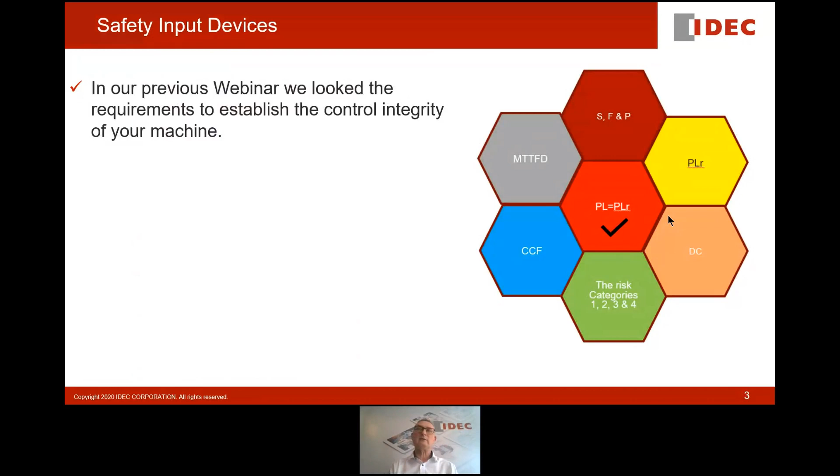So let's move on. So previously, in the last presentation, we discussed the control integrity of your machinery. So we looked at the performance level and how to achieve that and all the characteristics that were necessary to understand to make that happen. But in this part one of two, we'll be looking at the mechanical input devices of the ILO, the input, logic and output.

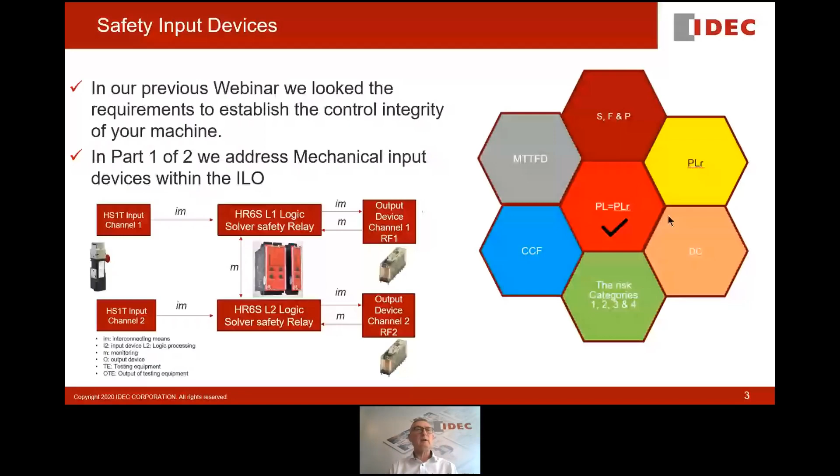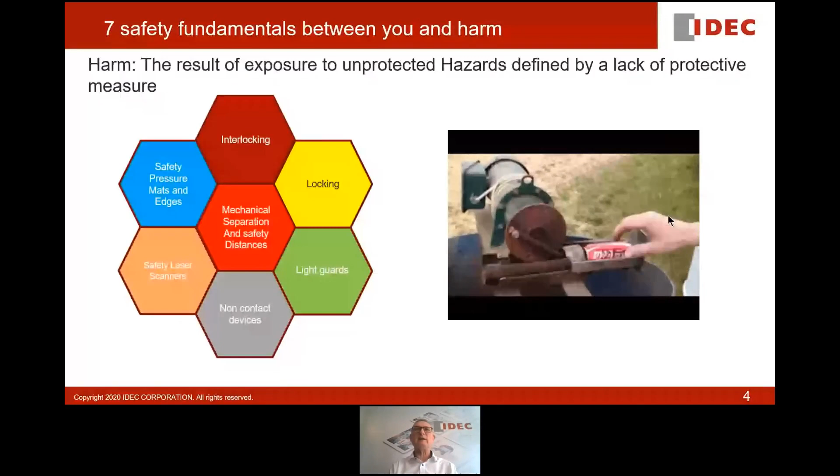So first of all, 7 fundamentals that you need to put between you and harm. And I'm sure we can all look at the video on the right hand side and see what could possibly happen. We can all have a guess about what could possibly happen, but we all have a pretty good idea about what will occur. We put the separation techniques in place to ensure that we don't get exposed to harm.

And to do that, we have to identify the hazards that exist on the equipment, with the equipment throughout its entire life cycle if you're building machines. And then we have to address all of those hazards that exist: electrical, thermal, biological, chemical, physical, mechanical, hydraulic, noise, and it goes on and on. And the only way that we can actually fully identify that is by performing a full and detailed risk analysis.

Once you have done your risk analysis, you then structure a safety requirement specification, which we covered in the first webinar. And the safety requirement specification lays out the requirements to make your equipment safe. So it's not a case of we've got a door guard and we need a switch. It's we have a hazard. The separation is by application of a method of mechanical separation. We need to interlock it.

So it's really important that we do it by risk assessment and not a hunch. So do not shortcut the risk assessment phase, because it is an iterative process and you will go back and use it in your validation.

So what is the route to selection of good and useful interlocking devices? Well, the good news is that we have the Machinery Directive, which I've talked about many times before. And in there, it clearly states that moving parts of a machine must be designed and constructed in such a way as to prevent the risk of contact. And it must not lead to an accident. And where the risk persists, you have to have a guard fitted and potentially protective devices that separate that guard.

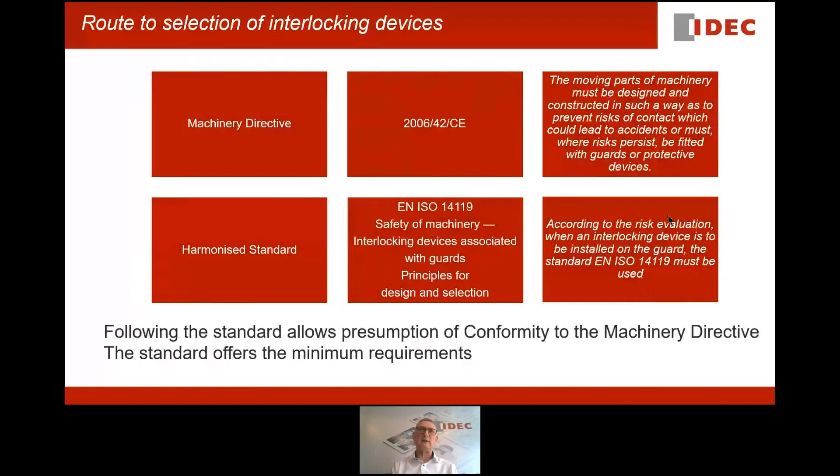But there's more than just that one standard. I've just taken a few here, but these are the most common ones. Clearly 12100 will identify the hazards that exist on the machine and gives you a means of evaluating the risk that they pose to the operator using it. But it's not just the operator, it's the people who are moving around the machine.

And for that reason, you have guarding from EN ISO 14120. And if you're choosing a guard and you're selecting a technique or a type of material, you need to understand the safety distances that the guard is positioned away from the hazard. You need to understand the speed of approach that the person who goes into the machine is actually moving at. If the machine is moving extremely fast, is it going to come to a halt before the operator has been exposed to that moving hazard?

And if you're bringing a machine to a halt, it's very often the case that you're controlling energy, and you're controlling that through a means of shutting down or isolating paths. And those isolation paths and control techniques are detailed in EN ISO 13849 Part 1 and validated in Part 2. And that's particularly important because when you start talking about the approach speeds, you're now talking about controlling the devices and their reliability and how they perform.

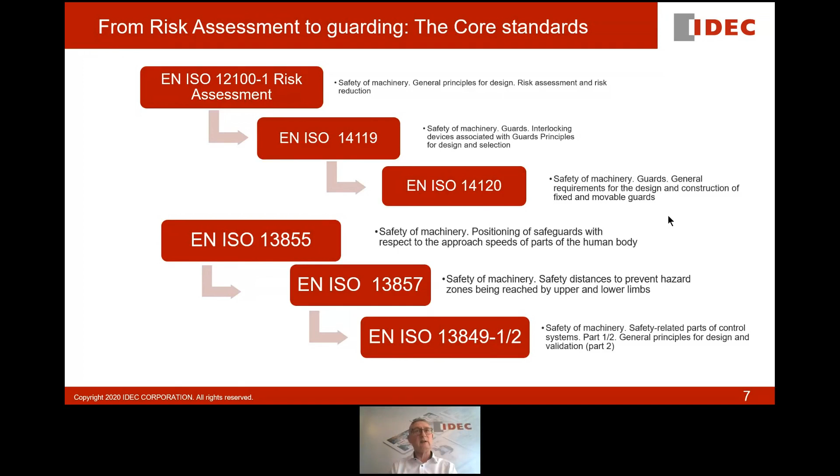So that standard allows you to assess the performance levels of each of the devices that you are now relying on, and the input, logic, and output combine together to create three systems that join up and ensure that that machine has stopped at the appropriate time when you gain access.

So what is the hierarchy? There is a hierarchy that we have to go through. And first of all, when we have a sheet of white paper, if we want to make pizzas, I always think of this one because I've seen it before, could we make pizzas at an industrial level without using a pizza press? Probably unlikely, but it should be considered. Is there a way of shaping the dough in such a way that it would design out the function and actually make it irrelevant to the manufacturer of that process? And that is number one.

Once you've actually done that, then you need to look at the hazards that have been identified in the risk assessment, detail them, and look at whether or not you can improve the functionality to create the same effect. So I'll take one example. We have a square-edged pin going down through a hole, and if I were to catch my hand in there, that square-edged pin would sadly rip the end off of my finger.

However, if I make the first 20 to 30% of that pin tapered, if my finger were to be caught, it gives me an increased chance of escaping because the tapering will create a gradual and progressive pressure rather than an instantaneous shearing. So simple examples like that can be applied. And when you do that, you start to reduce the risks at each point identified in your risk assessment. But eventually you get to the point where you know that there's still a trap point and it still could create quite a severe injury.

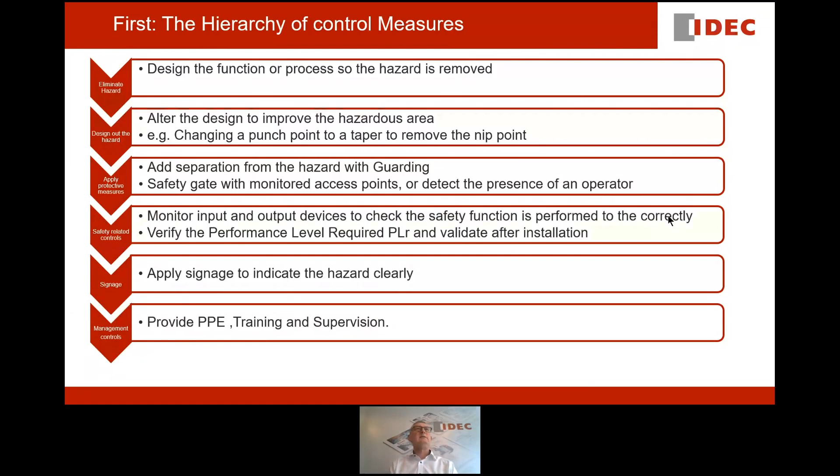So, what are we looking at in 14119? We're looking at guarding and interlocking with or without a locking function. We look at escape release. So if someone is entrapped in the machine, what do we do to open the guard and get out? We have to consider the physical conditions that these interlocks and guarding devices are being used in. We have to identify whether or not there would be resistance to defeat and whether there's a reason to defeat a guard. And that very often comes up in the risk assessment.

And just on a light note, if you ever don't believe that a guard is being overridden, just go up to the machine, look where the footprints and the hand points are, and you will find out where that guard system is being overridden. It's always a telltale sign.

We address coding of the devices to ensure that they can't be overridden with simple means that are in the workplace. But we also have to talk about fault exclusions. These are errors that could occur but are highly unlikely to occur in such a way that would affect the safety of the machinery. We'll come on to that in more detail in the next presentation.

We look at the basic principles of applying the devices, the functionality of interlocking and the allocation of the interlocking types, because there are 2, 3, 4 different types of interlock that we have to address. And we also have to talk about holding force, mechanical and electromechanical, and signaling when the door is shut.

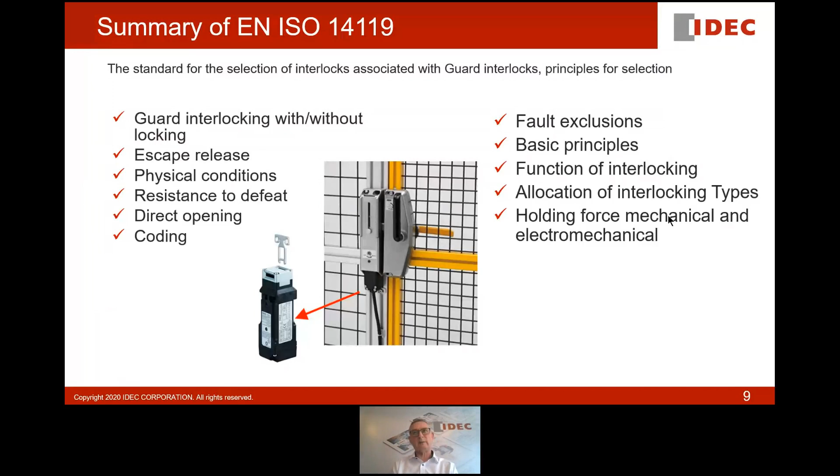So a few moments ago, I mentioned the interlocking types. Well, there are 4 basic types, 1, 2, 3 and 4. So we have type 1, an uncoded interlocking device, normally a cam-operated device, which can detect whether the guard is open or closed. It has some issues, which we'll talk about under fault exclusion and common cause failure in a while.

And then we have the type 2 interlock device. That's a device coded in some way so that you can't just stick a screwdriver or a hair clip in there and make it work. It has to be what is known as tamper resistant.

That's a very common device, very often used, perfect for use on small to medium-sized machines. But on the larger machines, you can simply increase the rigidity and the strength, and you can add further mechanical means that put the door action in a shear and the switching action in a more linear path that is not exposed to the same level of force. So engineering design and how you apply it is particularly useful.

And then we have type 3 and type 4, coded and uncoded. So magnetically operated switches are perfectly acceptable to be used in a safety environment. They have to have means of protecting their internal contacts. The clue is in the name.

They are non-contact switches, which means that when the door shuts, there should be a buffer, and that buffer should prevent the devices from coming into contact with one another. They are incredibly reliable. They have a very high switching frequency and a very high lifespan, provided that they remain not in contact.

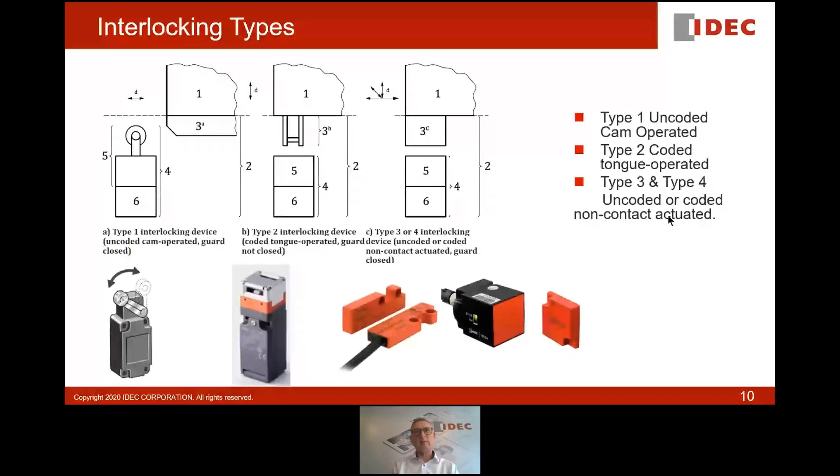So I probably already talked my way through this slide, but fundamentally we've got mechanical and non-contact switches. In the non-contact, there are lots of different technologies that are acceptable: inductive, magnetic, capacitive, ultrasonic. Of course, you can use optical. What is important to remember is, with devices like inductive, if there is a risk of an accumulation of ferric material, it could in fact cause a nuisance tripping. So it's very important that every single time the door opens and closes, that sweeping action takes place that creates that removal of anything that might be built up.

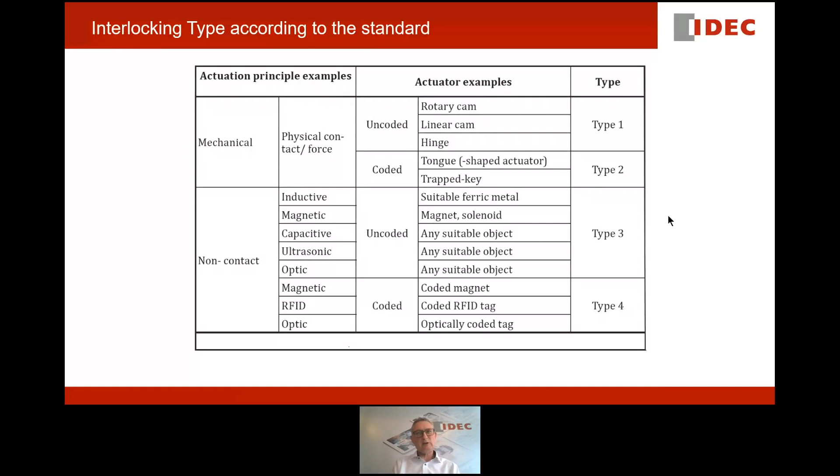So uncoded and coded devices. When we start talking about the coded, you can code up with multiple magnets, with north and south, south, north, and so forth, normally about 5 or 6 pairs of magnets, all operating in a different way, but when they're switched together, their common signaling gives you 1 or 2 channel output. And with the RFID, the tagging gives you similar to all of the tagging that you see on the products around the world, but the coding is set in such a way that as you tag, it is unique to the application, and somebody can't come up and just bring another actuator up.

So let's just go back to the very beginning. And if you have a limit switch fitted onto a machine, you see it all the time. In fact, in some of the standards for presses and for injection molding machines, it's the prescribed method for utilization on a machine. You can fit 2 limit switches. But if you apply a single limit switch, then that has to have direct opening contacts. And a single non-direct mechanical action must not be used. It has to be paired with a direct opening device. And a direct opening device is defined by the little arrow symbol.

And as you slide the door guard across, the leading edge of the door guard compresses down and forces the door open, and the switch contacts open. And the switch that's following, trailing down the bottom, for example, here, as it follows, the spring pushes up. That is not a safe function, but the primary safety function has been taking place in this position. And then when we close the door back into the run state, we are then using this leading edge to compress down the switch. And if there is a problem, it will break and separate the contacts.

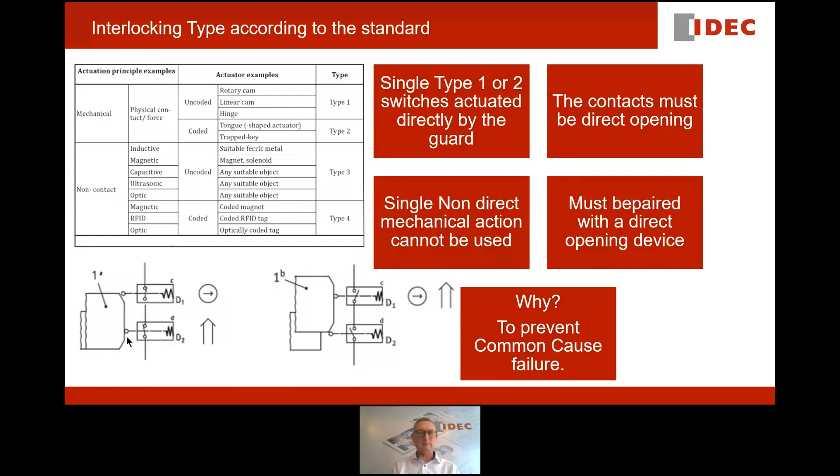So why do we do that? Well, it's to prevent common cause failure, because roller limit switches, as they stand on their own, have many things that can go wrong with them. The worst case thing that I see is a single switch being fitted with just 2 fixings. You only have to undo 1 screw and you've completely defeated it. So 4 screws applied properly and 2 devices monitoring both the forward and the backward travel gives you an excellent dual channel, dual switch means of monitoring.

So let's have a look at the guarding and the definitions. I think this is really quite basic. Yet every week, pre-COVID, I go into factories, and I see the same problems time and time again. So we'll go back over these points now. Fixed guard with screws, nuts, or welded into place. It can only be opened or removed by the use of tools or by the destruction of the fixing device. So it's pretty clear. You cannot just wander along and unhook that guard. Fixings must remain attached to the guard in place.

So when you unscrew it, the fixings have to remain through the metalwork. And that's normally done just by adding like a crinkly washer on the back. And then when you take it off, all of the screws go with it. Well, why is that? Well, in simple terms, day 1, it's got 6 screws. Day 10, it's got 4 screws. And finally, it's just got 1 screw left on the top.

So having them in place means that it is put back on properly. And if you don't do them all up, then the guard will be projecting and will have to be screwed down properly. It's very visible. So where possible, you should not be able to have the device hanging in place. So things like keyhole slots are just not permitted. You can't just hang a keyhole slot on and then unhook a guard. That's a movable guard and we can't have that.

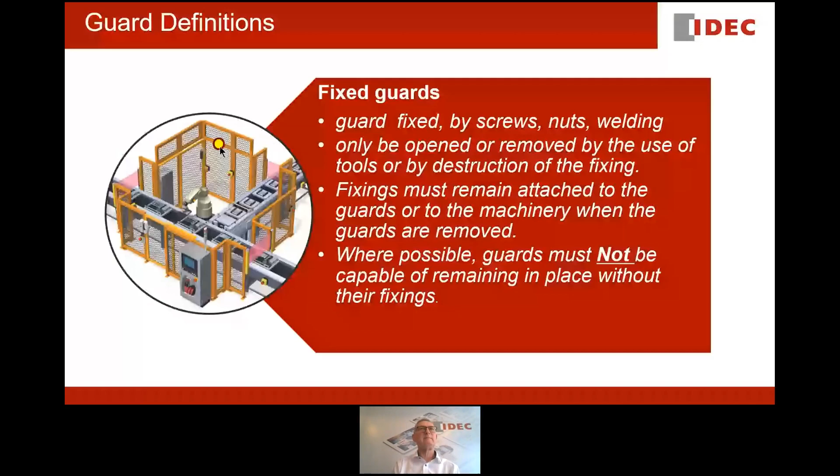Now, in the world of safety, we do live in the real world, and we accept that this job today will be different to the job tomorrow. So the better the adjustability and the better the application is for putting the guard in the location where you think the hazard or the parts are being ejected, the better it is. So it's okay to use adjustable guards, but most importantly, training and supervision, making sure the right people know properly how to use this. And you'll find normally in an engineering workshop, within their risk assessment, they have skills matrices which detail who can do what tasks and whether or not they're authorized to perform that use.

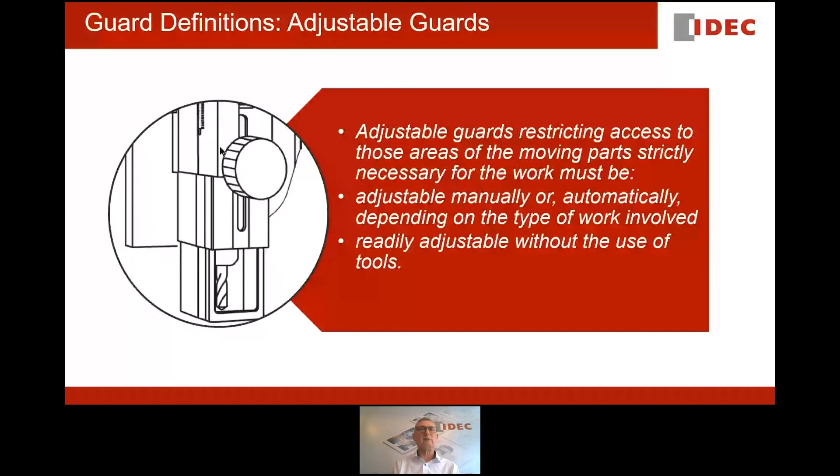And then we have interlock movable guards. And those guards have to ensure that the hazardous functions that exist on the machine are in an off state if the guard is utilized. If the guard is opened, then a stop command has to be given, and that stop command has to shut down the hazardous motion. And we start to consider here the distance between the hazardous motion and the active moving components that are going on inside.

But we also have to think during our risk assessment, how many people are working in the area? Can they move from one location to the other? Can they move through from one position into the other in the machine? Are there multiple people? So once you get into this movable guarding, you've then got to consider the zone of control, the zone of control of the emergency stop, and then consider how far people can progress inside.

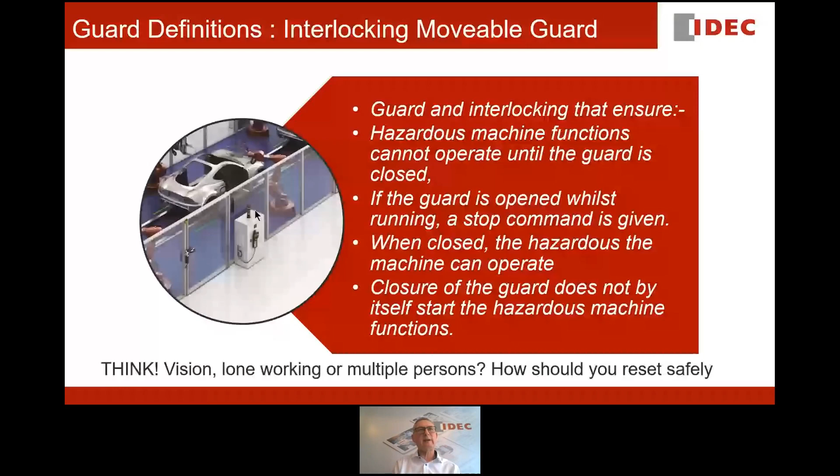The mechanical guarding can be in place for high-speed operation, and then maybe you use the laser scanner or something like that for programming or stepped control at low speeds, and in this instance a maximum of 250 millimeters per second. So you have to consider how you restart and re-energize at the end of using that door guard.

So some interlocking definitions. So interlocking, I've probably already covered this, is mechanical or electrical or other means to prevent operation of hazardous function on the machine. Now, in general, people look at this and think electrical interlocking, but it could be mechanical. It could be absolutely mechanically keyed in. Something like removal of energy using a key, and then that key opens a gate, and because the power is dissipated, we've got access. So don't just think about electrical control, there can be mechanical as well.

So a guard locking device is one intended to lock and or interlock the guard in a closed position. Of course, they can be completely integrated into one, but it's not mandatory to do that. You could use a shot pin and you could detect that shot pin's position. We'll talk about that in a short while. And then electrically monitor that back into a safety related control system.

And so your guard system has to be linked up with your safety control system, which is to EN ISO 13849. It could be to IEC 62061 for electronic programmable equipment as well. But I have to emphasize that where we have electrical and programmable equipment, because the guarding is invariably mechanical, you tend to default back to EN ISO 13849.

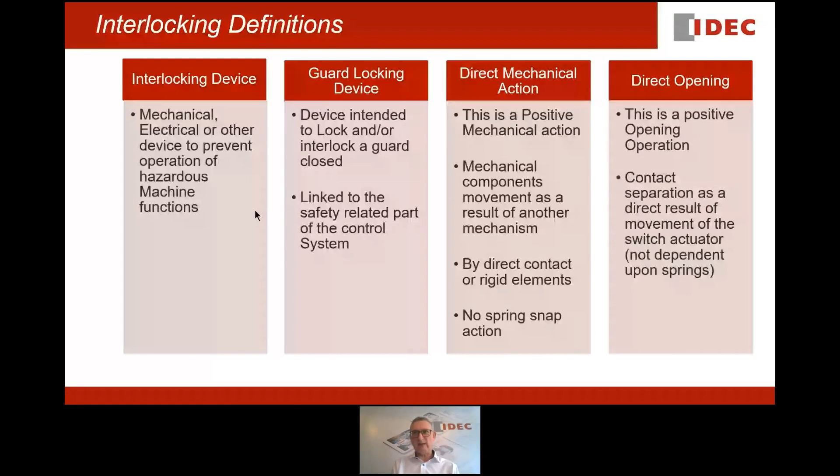And then we've got direct opening. This is the most common thing that you see in the safety switches, especially with the mechanical ones. And that's a contact separation as a direct result of the movement of an actuator. And the actuator does not depend on springs. Okay, we cannot have any spring movement.

So just a quick fly through here on actuation means: actuators have to be done in such a way that you can't tamper with them. You insert them into the switch. You go into the actuation system, which is invariably a rotary cam mechanism, a couple of locking cams, and a main drive cam that presses a plunger forward and forces the contacts in the output section apart. So the movement of that door has a direct action on the separation of the contacts.

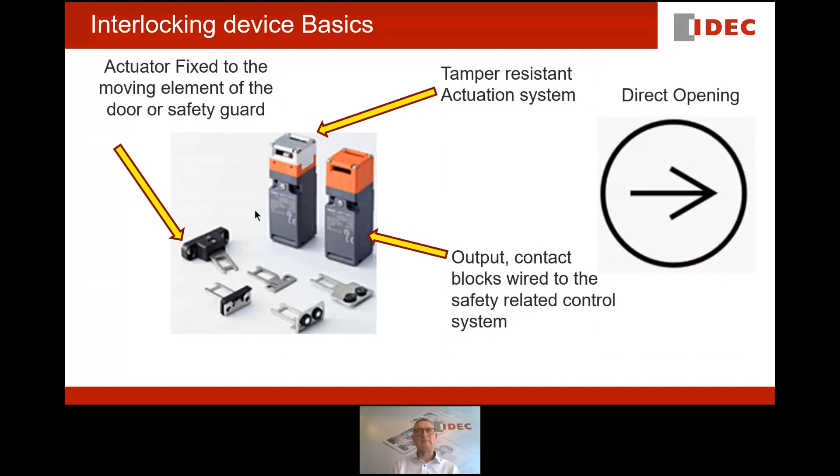In principle, this is very simply demonstrated here. If I take a hinge operation onto a limit switch, the high point of that hinge and on that cam mechanism there presses down and creates a forced disconnection. That's how it works, very simply.

Non-direct methods should not be used as a standalone. I've mentioned that you can do two together, but you should never have a single limit switch operating in this way, because if the roller breaks, the screw comes undone, the cam locking mechanism comes undone, you lose the indication and position of the door. And therefore, I still see it.

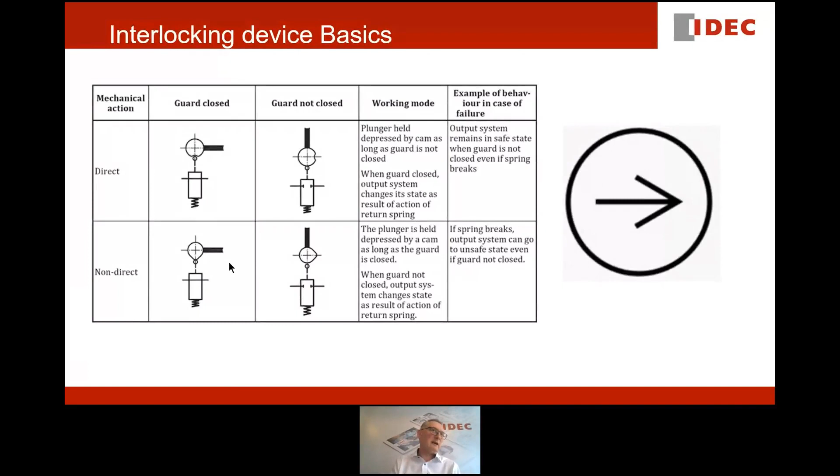So just a quick recap. Protective fences must ensure that there is no way into the hazardous zone, and if the guard is open, the mechanical actuation of the safety switch stops the machine in time before you gain access.

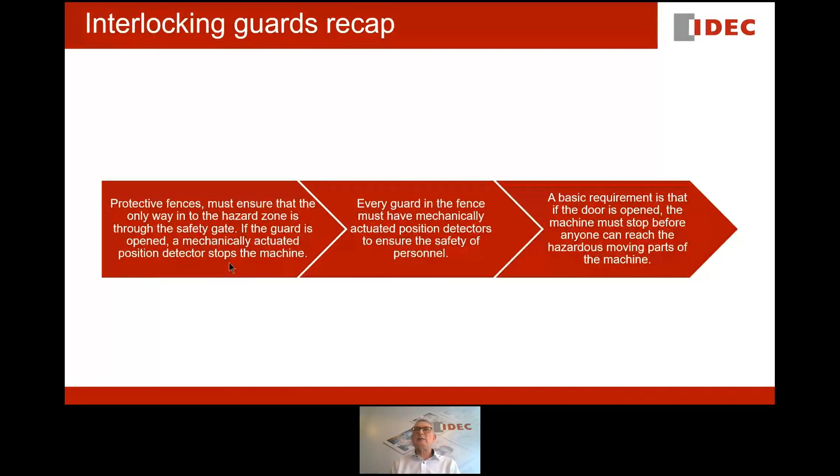Every guard fence must have a mechanically actuated device on it, but that could also be a coded device, which we'll talk about in detail in the next presentation. And the basic requirement is, as I've already said, open the door and the machine comes to a stop.

So interlocking selection criteria start with risk assessment, like I've already talked about. We've looked at our guards and we've decided that there is a requirement to have access into that location. If there isn't access into that location, then the guarding is bolted and would normally only be removed for major unexpected maintenance. If there are maintenance requirements, you should be able to gain access through the doors and do quick maintenance. We don't want guards being removed for minor interventions into machines.

If we are removing guards and taking them away, then there should be a separate and deliberate lock off, tag out procedure, because it is likely that that guard is going to remain off and the hazards will increase. Again, this should be detailed in the risk assessment.

Very important that we address the stop time of the machine and the approach speeds and the reach distances. It's no good putting a guard in place if we can reach over and reach the hazard. So in the next presentation, we will actually be covering the stop time calculations that relate to the light curtains and laser scanners.

And most importantly, we've got to also address the fact that just with a basic mechanical guard, you can still gain access to a machine before it's finished, especially if it's a hinged guard and they're very large. You can open a guard. Every device has what's called a hysteresis, and if you open them simultaneously, you can get your hand through that guard in sufficient time to reach moving machines. So stop time tests do not only apply to protective optical devices.

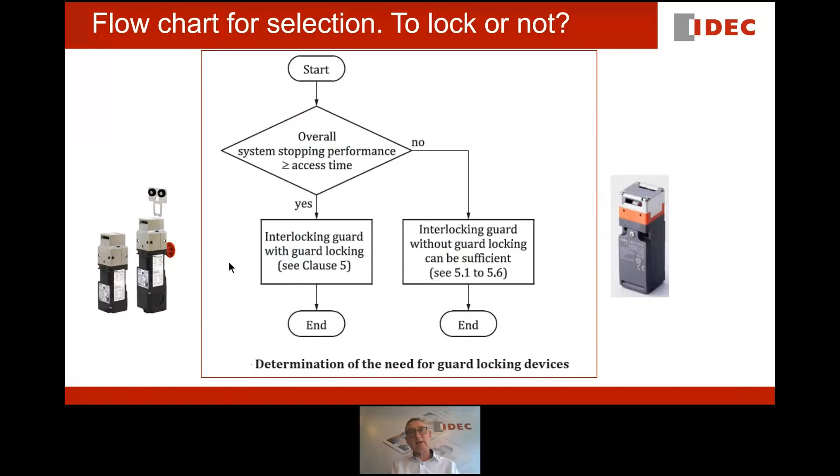And of course, I mentioned already, if you're controlling, then you should be looking at 13849. So what's the flow chart for selection of a lock or not to lock? It's pretty simple. If you can gain access, then you should use a lock if there is a rundown time. You need to identify how long that is, and then through your control process, control the signal that goes out to the solenoid locking switch to prevent access to that. If it's instantaneous, no problem, just use an interlock like you see on the right-hand side.

So with the guard locking, there are a few things that we should address. When the actuator passes in and out of the switch into the closed position, it has to ensure that the cam has rotated and the spring has pushed the contacts together. Now I emphasize there, the spring brings the contacts together, and it is the opening and the rotating of the cam that creates the separation. So if we've got welding going on at this point here, the physical rotation of the cam will provide sufficient force to snap those contacts open.

And one term that can be used for that is bifurcated contacts, which are basically like a mechanical fuse and have a narrow waist in the middle. And when the cam pushes, if it's welded, it will snap it open. And you may wonder why your machine won't restart. It's because your contacts are broken.

So we're looking at spark erosion on the contacts and what can we do to protect that? So we're looking at inductive loads in our control circuit. Are we fitting snubbers or diodes there to make sure that we've got the best possible switching conditions for our safety devices? Again, it's a basic, well tried and tested principle, but if you're drawing an arc across a contact, you are eroding it, and eroded contacts will weld and fail to danger. So make sure that you've got your basic principles of your control circuit sorted.

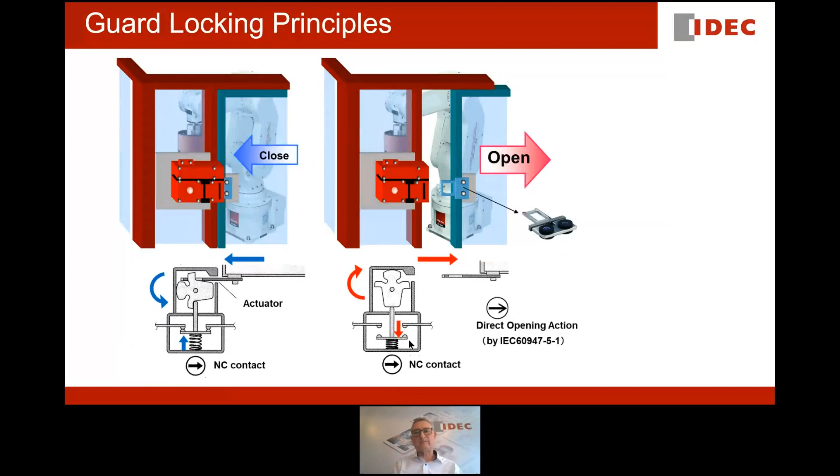Now this bit causes a huge amount of confusion. Do I use dual channel, or do I use dual channel safety with single channel monitoring? Well, it really comes down to risk assessment and what you want to achieve. But what you have to remember is for the actuator that is passing in and out, it will create a separation of these contacts and switching the auxiliary when you open and close the door.

When you lock the door, and that is the motion of changing the solenoid, whether it's power or power off, I'll talk about that in a moment. When you lock the door, you have got this linkage here, which shuts these two contacts. So door closed must not lead to the start of the machine. It has to be door closed and verified as locked.

And if you're on a high-risk machine, it makes sense to have synchronous switching between the actuator and the solenoid, and therefore they are wired in series. For a slightly lower risk machine, it's acceptable to have less lock monitoring and dual channel going on the front end, on the actuator.

But there is an electrical and a mechanical linkage in both that determines that the door is shut and that the signal can then be sent to the control system to apply the locking feature, and then the door is shut and you will not be able to gain access. And you will have to send a fresh signal to that door in order to be able to open it. So, most important is verification by electrical and or electromechanical means to make sure that that door is in the correct state.

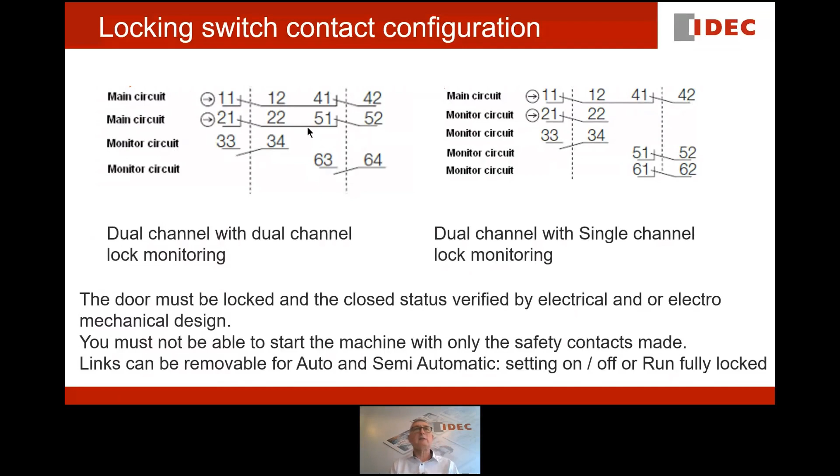And they do that by separately monitoring into two channels this pair, and then separately monitoring this pair into two channels, and they remove the links. And what you do is you use something like a safety PLC to actually reinstate those links for fully automatic. So for setting, you remove them, and for fully automatic, you put them back in again. Now, all of that is subject to meeting the correct requirements of performance level, but it is quite common to see those links removed. And most manufacturers, including ourselves, have those links removable.

So, principles. Power to open means no volts, and then we apply power to the lock, and the lock comes open. It's pretty straightforward. Energize the solenoid, pulls the pin back. In the standard, it's drawn like this, which is just an actuator going backwards and forwards. And it's the most normal way to do it. About 95% of applications is you power it up, you apply a signal, and it opens.

But you can also use power to keep it closed. So in that event, we apply a signal, that signal voltage sends it forward against the spring, but then we're relying on the spring to open the door. But we're also recognizing that in a no volt situation, it could in fact spring open. And we need to recognize that in our risk assessment. And it's for that reason, only about 5% of applications actually use power to lock.

The norm is power to open, because in the event of a failure, that door will remain in the lock state. So 95%, 5%. But there are reasons. There are times when people might need to do it.

Most importantly, it doesn't matter how this works with a pin, but that pin can only be ejected forward into the location. It cannot ever be ejected into free air. If you put it out into free air, it's missed the lock location and it is a dangerous application. And for that reason, that pin has to be monitored in the forward state, like I said in the last slide, electrically and or electromechanically monitored, so that we know that it's in the lock state and not just sticking out a little bit like a door being held open and somebody releasing the button on an apartment.

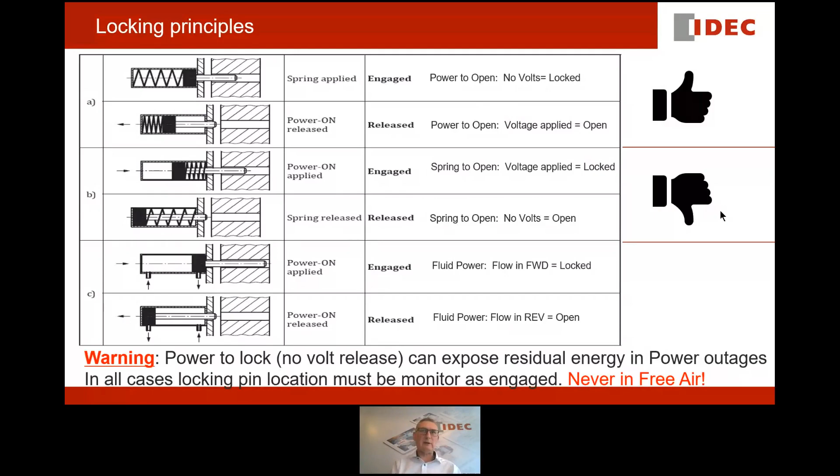They have their place. You often see them on the side of high-speed rotating saws and band saws and that type of thing. It's very common with a threaded exit. Sometimes you see threaded with an auxiliary or a secondary switch, but what you will often see is they're put in a corner or they're put next to a post. And when I say a post, I mean a mechanical obstruction quite close to where the thumb wheel is.

And the reason for that is because one of the first things the apprentices learn is if you wrap a piece of string around it and pull it, you can spin it at high speed. If you spin it at high speed, you've overcome the time. So it's important to make sure that the devices have anti-spin, so they put friction material in.

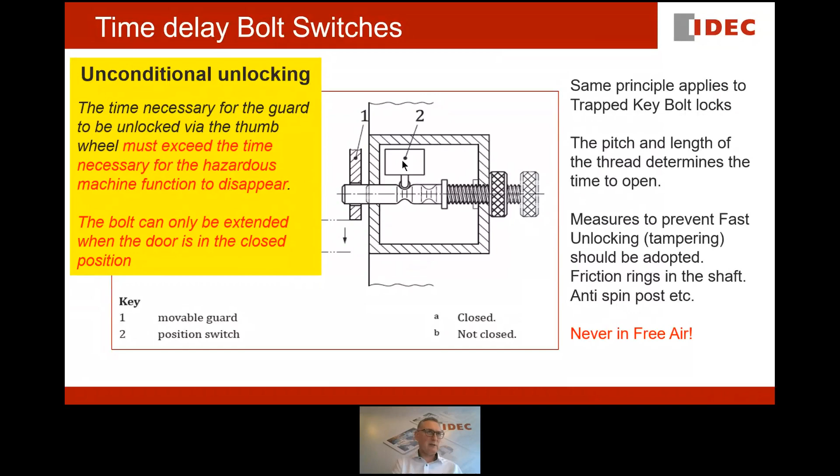And again, as I said in the previous one, it's important that you cannot let that go back out into free air. So it can only be obstructed if it's on a hinge guard. The only place that it can ever be ejected forward is into the hole when the door is in a closed position.

So what can we do for a conditional access? Well, certainly something that we see more and more of around Europe, and maybe slightly more of a British thing, but you see high quality control access locks, which can either isolate a 2-channel safety circuit or in fact isolate the power, air or hydraulic power. And you can take that key off to a key exchange.

Also, the release of the key, like with the solenoid lock, is associated with a safety-related control, and it could be that it's time delay. So providing that time delay gives the additional reaction and then delay for the hazards that exist on the machine. And similarly, we can do it like with a control release, key operation, and go in, and you can't open the door or the solenoid locking. Even if the solenoid is locked, you still need the key to do it. So there are other ways, especially during mode change and that type of thing.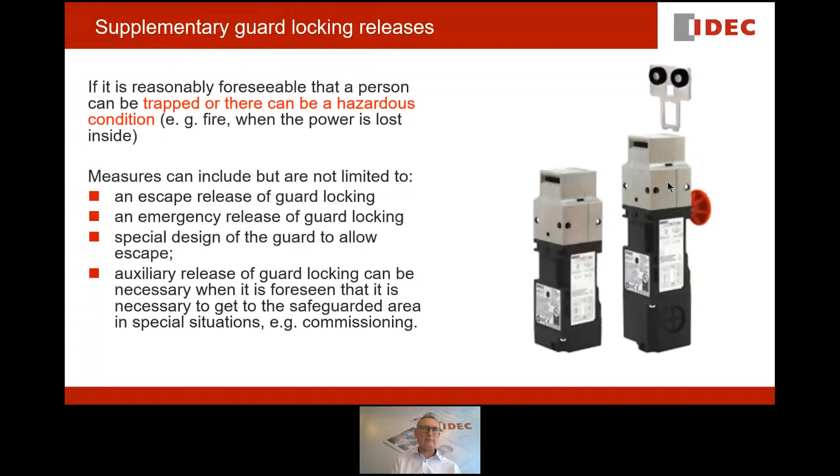So coming on to the last few slides now, assessment of fault conditions. For performance level E, fault exclusions are not permitted. So let's just quickly remind ourselves what a fault exclusion is. That is a design function within the machine, within the component, that we know that if it breaks, it would lead to a dangerous situation. But through testing and through accepted lifespan testing, we recognize that it's unlikely to happen.

I'll give you an example of a fault exclusion. I've got a single contactor, I've got a 4 kilowatt motor, and I've put a 25 kilowatt contactor in there. Aging of the contactor is extremely unlikely. Short circuit effects are limited down to 4 kilowatts, so it's a very, very happy contactor. I might claim a fault exclusion, but I can't claim it at performance level E because we can't take that risk, because performance level E, you go in there, that's the last thing that you see.

So if you have a mechanical interlock fitted, there are fault exclusions around the rotation of the pin and the breaking of the actuator and a single actuator. So in that case, you want to provide a diverse technology, ideally, and with that diverse technology, you've got your switching function, you've got your door lock, and a separate interlock that's going to just detect just in case that breaks. But even with those fault conditions, you still have to provide, if it's performance level E, at least a monthly functional test, and at performance level D, annually.

So, fault masking. We will do a detailed analysis on fault masking during the next presentation. But just to give you a clue, if you open the first door and there is a fault in one channel, the safety relay will see it. But if you then subsequently open a second or a third door, it will see both channels cleared, but the first channel fault has been lost.

So it's very important that when you're configuring your safety circuits, if fault masking can occur, it's essential that you have a means of detecting it. And that could be one switch, one input, one switch, one input, or it might not be necessary because it's quite a low risk application. So be careful, because when faults occur, there can be a scenario where a second or third gate can open it up and you won't be able to detect it.

And that cascading of faults only really occurs in the volt-free contacts. If you use an RFID switch, it doesn't matter so much, because the cascade is done in such a way that switch 1 powers off switch 2, and therefore the cascade is inherent all the way down the line.

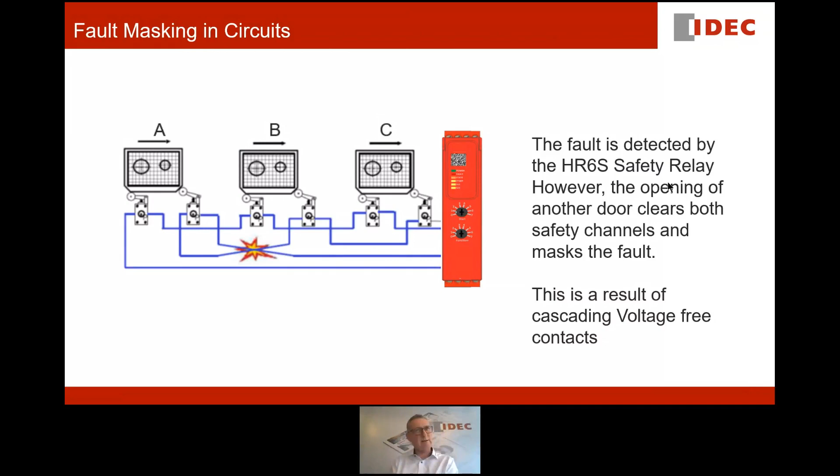So, coming up in part 2, we will look at positioning of devices in the optical electro-electronic. We'll look at light curtains and how to position them and the best things you can do for use of scanners, either in static or in mobile applications. And we'll look a lot about approach speeds and also a little bit more about reach distances and we'll go into detail on fault masking. And then at the end of that, we'll draw together and summarize the 3 previous webinars, and then just put together like a little risk assessment and understanding about what's going on.